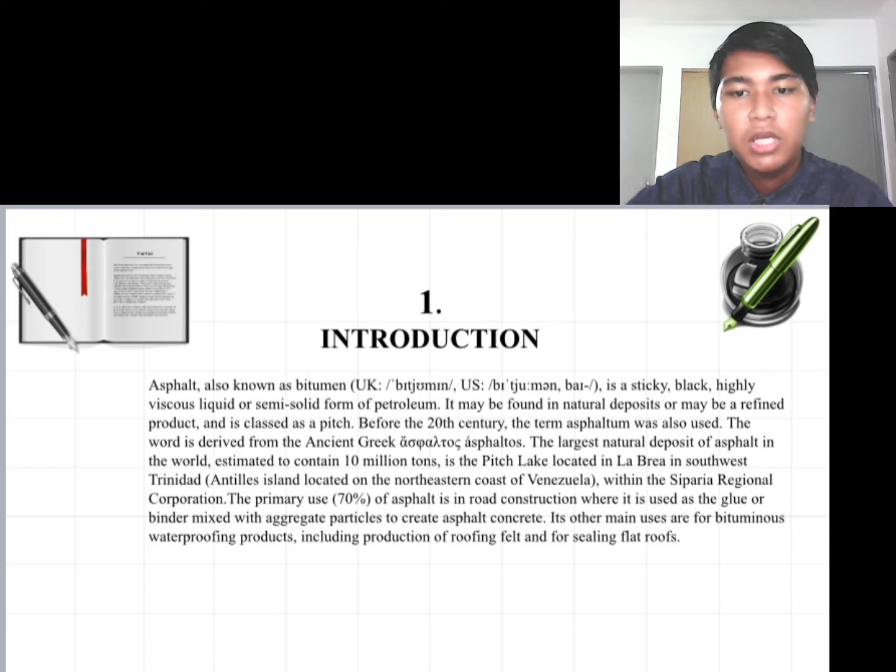Siparia Regional Corporation. The primary use, 70% of asphalt, is in road construction, where it is used as the glue or binder mixed with aggregate particles to create asphalt concrete. Its other main uses are for bituminous waterproofing products, including production of roofing felt and for sealing flat roofs.

In material sciences and engineering, the terms asphalt and bitumen are often used interchangeably to mean both natural and manufactured forms of the substance, although there are regional variations as to which term is most common. Worldwide, geologists tend to favor the term bitumen for the naturally occurring material.

For the manufactured material, which is a refined residue from the distillation process of selected crude oils, bitumen is the prevalent term in much of the world. However, in American English, asphalt is more commonly used. To help avoid confusion, the phrases liquid asphalt, asphalt binder, or asphalt cement are used in the US.

Colloquially, various forms of asphalt are sometimes referred to as tar, as in the name of La Brea Tar Pits. Although tar is a different material, naturally occurring asphalt is sometimes specified by the term crude bitumen.

Its viscosity is similar to that of cold molasses, while the material obtained from the fractional distillation of crude oil boiling at 525 degrees is sometimes referred to as refined bitumen.

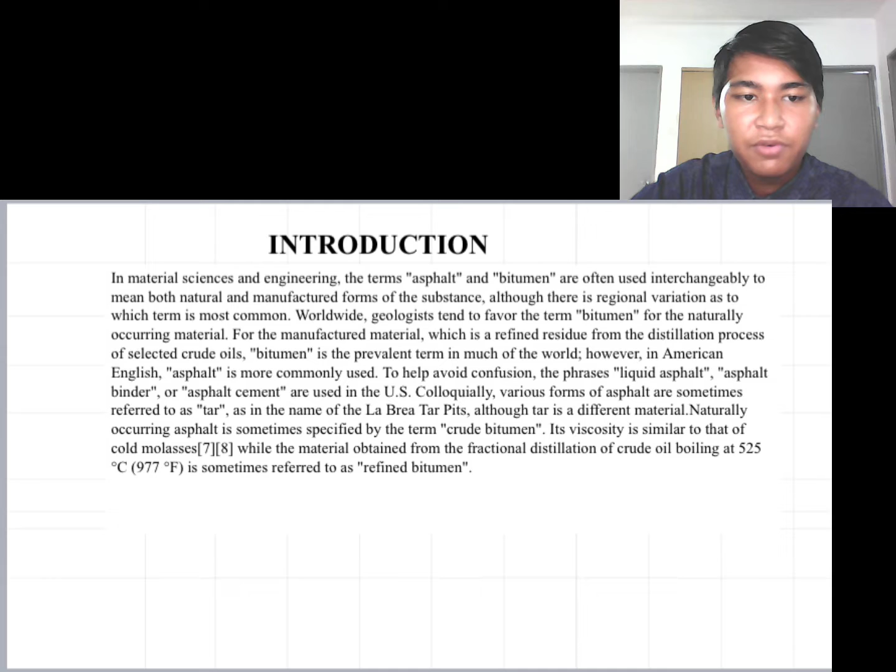Etymology. The word asphalt is derived from late Middle English, in turn from French asphalte, based on late Latin asphalton, asphaltum, which is the Latinization of the Greek asphaltos or asphalton, a word meaning asphalt, bitumen, pitch, which perhaps derives from alpha, not, without, the alpha privative, and sphallein, to cause to fall, baffle, in passive err,

be balked of. The first use of asphalt by the ancients was in the nature of cement, for securing or joining various objects, and it thus seems likely that the name itself was expressive of this application. Specifically, Herodotus mentioned that bitumen was brought to Babylon to build its gigantic fortification wall.

From the Greek, the word passed into late Latin and thence into French asphalte and English asphaltum and asphalt. In French, the term asphalte is used for naturally occurring asphalt-soaked limestone deposits, and for specialized manufactured products with fewer voids and greater bitumen content than the asphaltic concrete used to pave roads. The word bitumen is from Latin and passed via French into English.

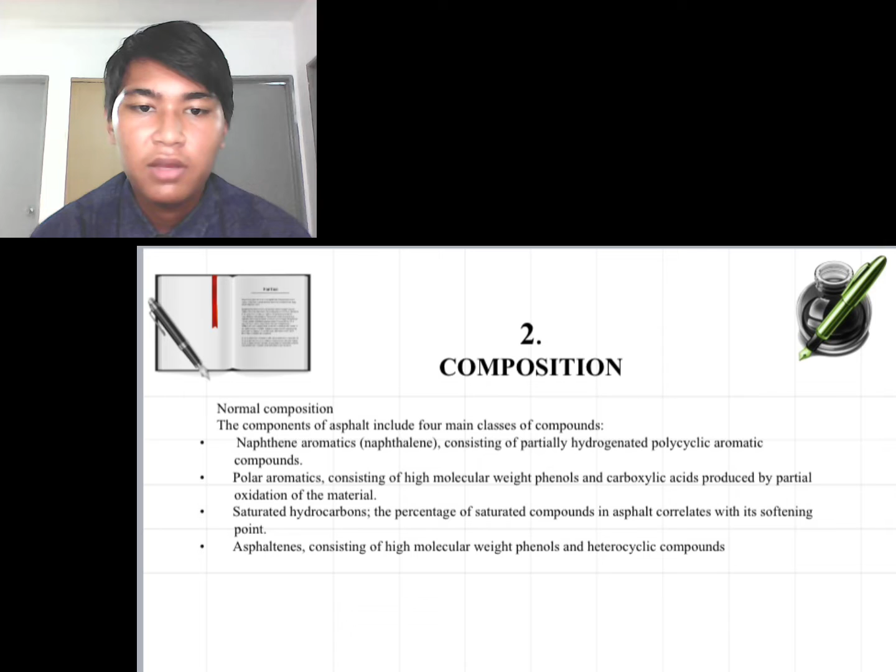The percentage of saturated compounds in asphalt correlates with its softening point. The fourth or last one is asphaltenes, consisting of high molecular weight phenols or heterocyclic compounds. The naphthene aromatics and polar aromatics are typically the majority components. Most natural bitumens also contain organosulfur compounds, resulting in an overall sulfur content of up to 4%. Nickel and vanadium are found at less than 10 parts per million.

As is typical of some petroleum, the substance is soluble in carbon disulfide. It is commonly modeled as a colloid with asphaltenes as the dispersed phase and maltenes as the continuous phase. It is almost impossible to separate and identify all the different molecules of asphalt because the number of molecules with different chemical structure is extremely large. Asphalt may be confused with coal tar, which is a visually similar black thermoplastic material produced by the destructive distillation of coal.

During the early and mid-20th century, when town gas was produced, coal tar was a readily available byproduct and extensively used as the binder for road aggregates. The addition of coal tar to macadam roads led to the word tarmac, which is now used in common parlance to refer to road-making materials. However, since the 1970s, when natural gas succeeded town gas, asphalt has completely overtaken the use of coal tar in this application.

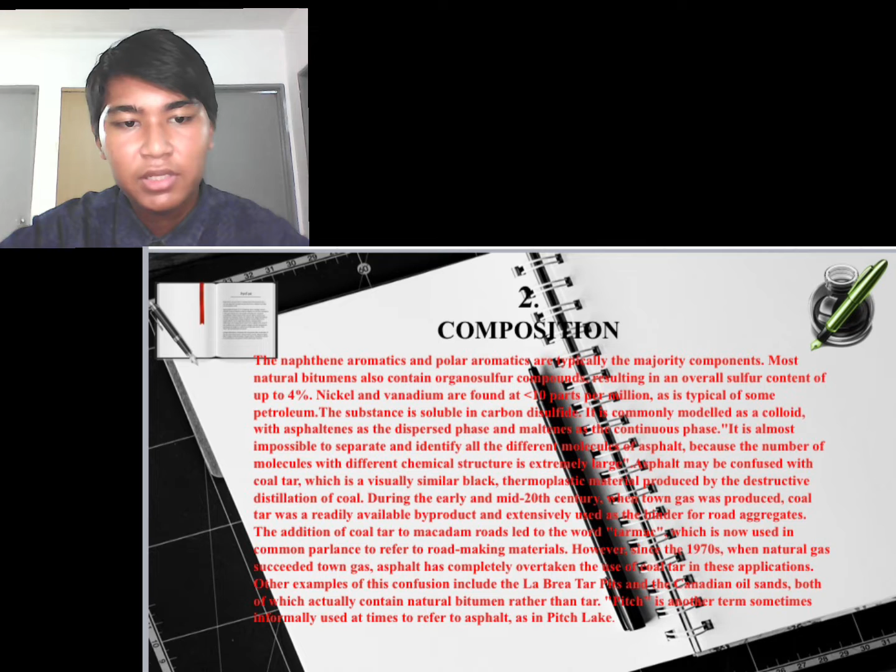Other examples of this confusion include the La Brea tar pits and the Canadian oil sands, both of which actually contain natural bitumen rather than tar. Pitch is another term sometimes informally used to refer to asphalt, as in Pitch Lake. Additives, mixtures, and contaminants. For economic and other reasons, asphalt is sometimes sold combined with other materials, often without being labeled as anything other than simply asphalt.

Of particular note is the use of re-refined engine oil bottoms, REOB or REOBs, the residue of recycled automotive engine oil collected from the bottoms of re-refining vacuum distillation towers, in the manufacture of asphalt. REOB contains various elements and compounds found in recycled engine oil, additives to the original oil, and material accumulating from its circulation in the engine, typically iron and copper. Some research has indicated a correlation between this adulteration of asphalt and poorer performing pavement.

The third one is occurrence. The majority of asphalt used commercially is obtained from petroleum. Nonetheless, large amounts of asphalt occur in concentrated form in nature. Naturally occurring deposits of bitumen are formed from the remains of ancient microscopic algae, diatoms, and other once living things. These natural deposits of bitumen have been formed during the Carboniferous period, when giant swamp forests dominated many parts of the earth. They were deposited in the mud on the bottom of the ocean or lake where the organisms lived. Under the heat above 50 degrees and pressure of burial deep in the earth, the remains were transformed into materials such as bitumen, kerogen, or petroleum.

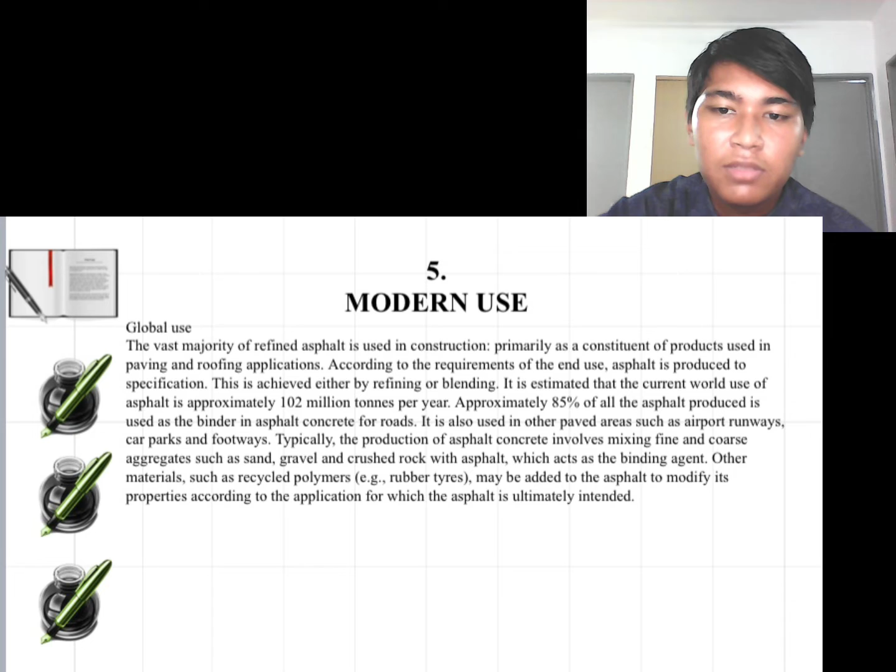Typically, the production of asphalt concrete involves mixing fine and coarse aggregates such as sand, gravel, and crushed rock with asphalt, which acts as the binding agent. Other materials such as recycled polymers, for example rubber tires, may be added to the asphalt to modify its properties according to the application for which the asphalt is ultimately intended. A further 10% of global asphalt production is used in roofing applications, where its waterproofing qualities are invaluable. The remaining 5% of asphalt is used mainly for sealing and insulation purposes in a variety of building materials such as pipe coatings, carpet tile backing, and paint.

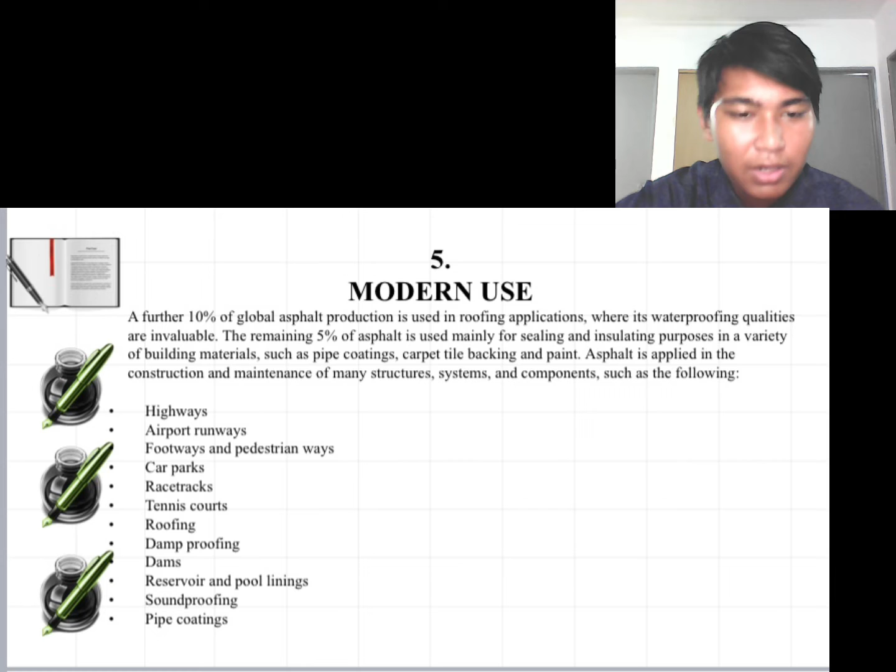Asphalt is applied in construction and maintenance of many structures, systems, and components such as the following: highways, airport runways, footways and pedestrian ways, car parks, racetracks, tennis courts, roofing, damp proofing, dams, reservoir and pool linings, soundproofing and pipe coatings. Rolled asphalt concrete.

The largest use of asphalt is for making asphalt concrete for road surfaces. This accounts for approximately 85% of the asphalt consumed in the United States. There are about 4,000 asphalt concrete mixing plants in the US and a similar number in Europe. Asphalt concrete pavement mixes are typically composed of 5% asphalt cement and 95% aggregates like stone, sand, and gravel.

Due to its highly viscous nature, asphalt cement must be heated so it can be mixed with the aggregates at the asphalt mixing facility. The temperature required varies depending upon the characteristics of the asphalt and the aggregates, but warm mix asphalt technologies allow producers to reduce the temperature required.

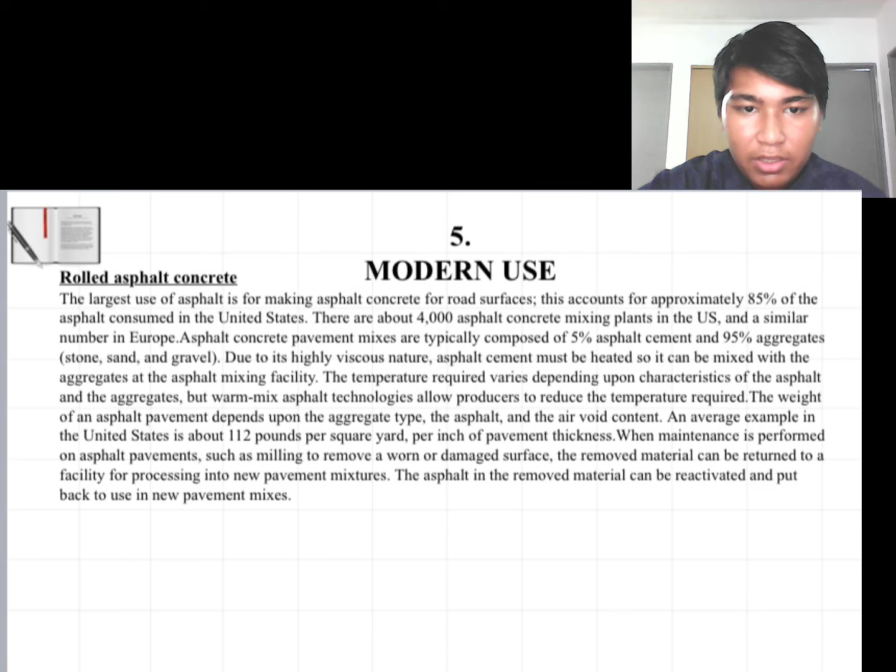The weight of an asphalt pavement depends upon the aggregate type, the asphalt, and the air void content. An average example in the United States is about 112 pounds per square yard per inch of pavement thickness. When maintenance is performed on asphalt pavements, such as milling to remove a worn or damaged surface, the removed material can be returned to a facility for processing into new pavement mixtures. The asphalt in the removed material can be reactivated and put back to use in new pavement mixes.

Mastic asphalt. Mastic asphalt is a type of asphalt that differs from dense graded asphalt concrete in that it has a high asphalt binder content, usually around 7 to 10% of the whole aggregate mix, as opposed to rolled asphalt concrete, which has only around 5% asphalt. This thermoplastic substance is widely used in the building industry for waterproofing flat roofs and tanking underground. Mastic asphalt is heated to a temperature of 210 degrees and is spread in layers to form an impervious barrier about 20 millimeters thick.

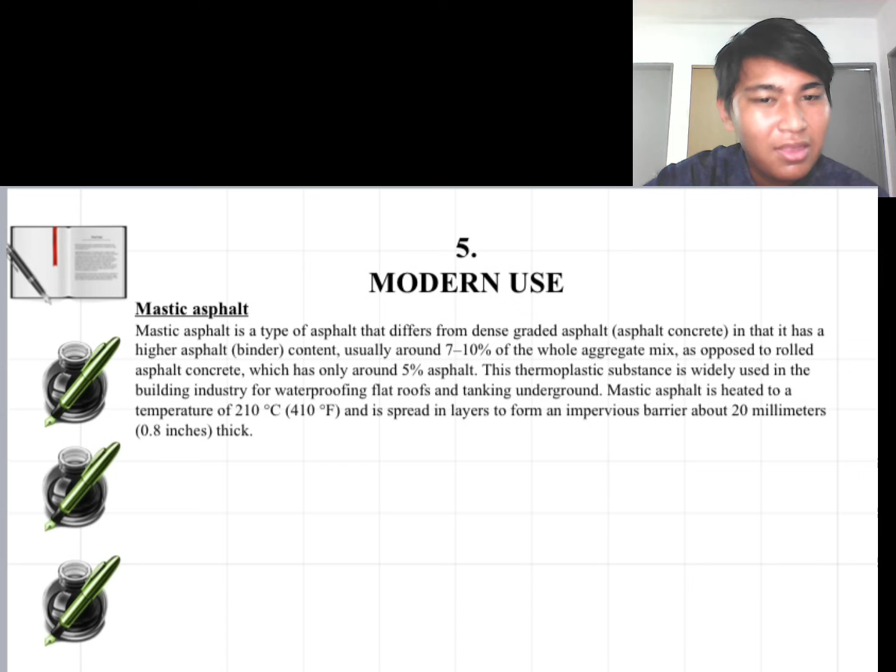Number 6 is production. About 40 million tons were produced in 1984. It is obtained as the heavy, difficult to distill fraction; material with a boiling point greater than around 500 degrees is considered asphalt. Vacuum distillation separates it from the other components in crude oil such as naphtha, gasoline, and diesel. The resulting material is typically further treated to extract small but valuable amounts of lubricant and to adjust the properties of the material to suit applications.

In a de-asphalting unit, the crude asphalt is treated with either propane or butane in a supercritical phase to extract the lighter molecules, which are then separated. Further processing is possible by blowing the product, namely reacting it with oxygen. This step makes the product harder and more viscous.

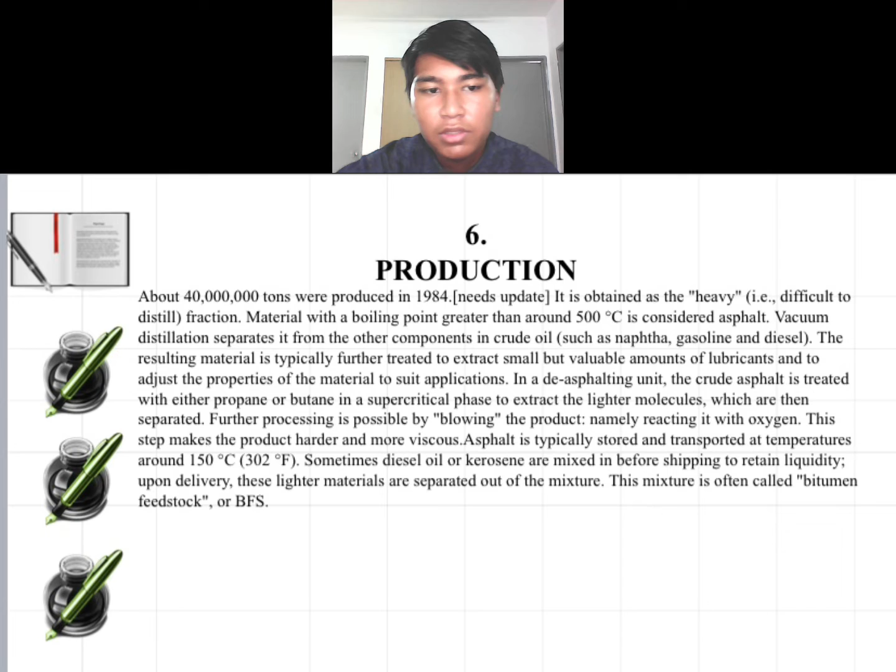Asphalt is typically stored and transported at temperatures around 150 degrees. Sometimes diesel oil or kerosene are mixed in before shipping to retain liquidity. Upon delivery, these lighter materials are separated out of the mixture. This mixture is often called bitumen feedstock or BFS.

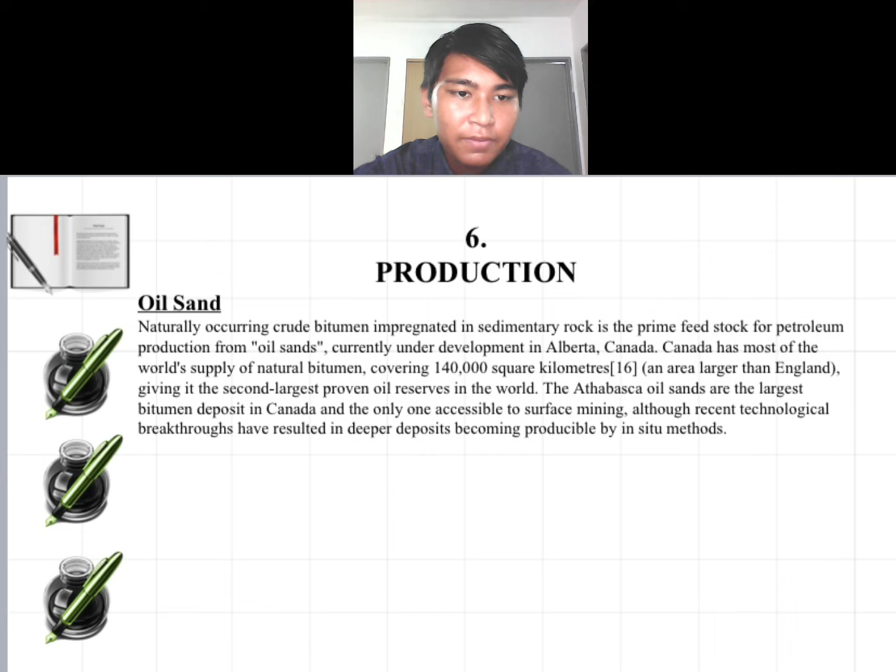Oil sand, naturally occurring crude bitumen impregnated in sedimentary rock, is the prime feedstock for petroleum production from oil sands, currently under development in Alberta, Canada. Canada has most of the world's supply of natural bitumen, covering 140,000 square kilometers, an area larger than England, giving it the second largest proven oil reserves in the world. The Athabasca oil sands are the largest bitumen deposits in Canada and the only one accessible to surface mining, although recent technological breakthroughs have resulted in deeper deposits becoming producible by in situ methods.

Alternatives and bioasphalts. Although uncompetitive economically, asphalt can be made from non-petroleum based renewable resources such as sugar, molasses and rice, corn, potato starches. Asphalt can also be made from waste material by fractional distillation of used motor oil, which is sometimes otherwise disposed of by burning or dumping into landfills.

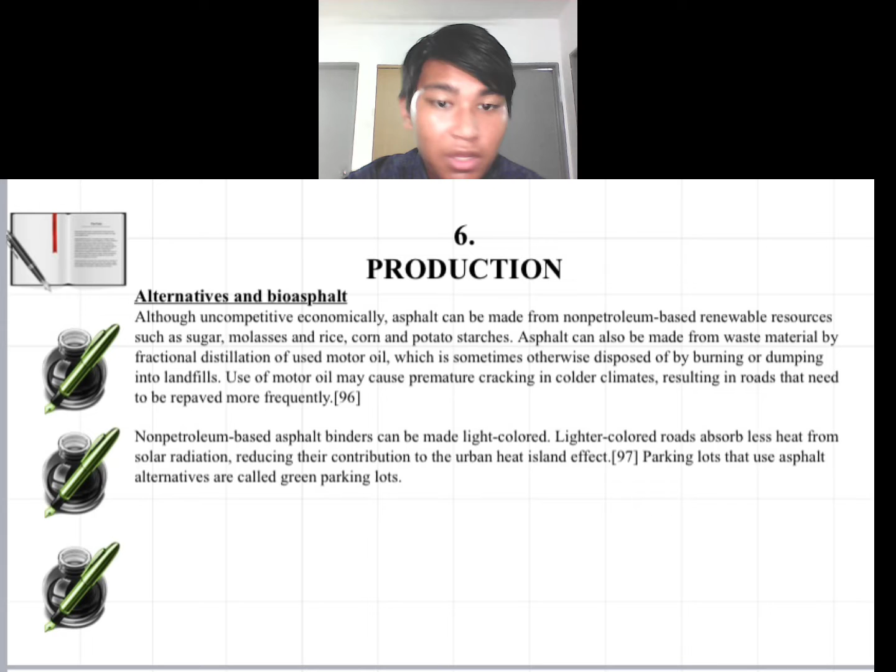Use of motor oils may be a cause of premature cracking in colder climates, resulting in roads that need to be repaved more frequently. Non-petroleum based asphalt binder can be made light-colored. Light-colored roads absorb less heat from solar radiation, reducing their contribution to the urban heat island effect. Parking lots that use asphalt alternatives are called green parking lots.

Albania deposits. Selenizza is a naturally occurring solid hydrocarbon bitumen found in native deposits in Selenica in Albania, the only European asphalt mine still in use. The bitumen is found in the form of veins, filling cracks in a more or less horizontal direction.

The bitumen content varies from 83% to 92% soluble in carbon disulfide, with a penetration value near to zero and a softening point, ring and ball, around 120 degrees. The insoluble matter, consisting mainly of silica ore, ranges from 8% to 17%. Albanian bitumen extraction has a long history and was practiced in an organized way by the Romans.

After centuries of silence, the first mentions of Albanian bitumen appeared only in 1868, when the Frenchman Coquand published the first geological description of the deposits of Albanian bitumen. In 1875, the exploitation rights were granted to the Ottoman government, and in 1912 they were transferred to the Italian company named Simsa. Since 1945, the mine was exploited by the Albanian government, and from 2001 to date, the management passed to a French company, which organized the mining process for the manufacture of natural bitumen on an industrial scale.

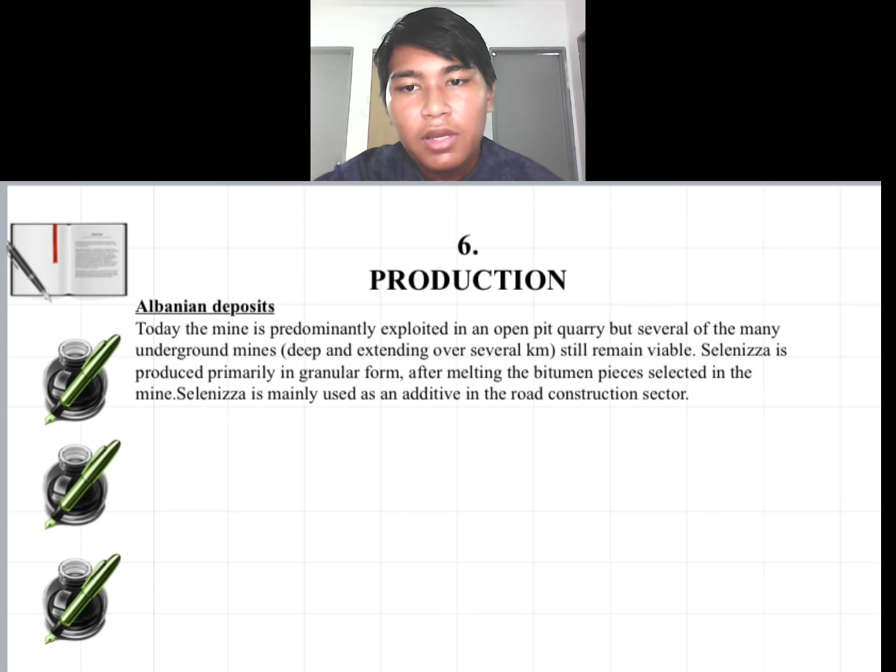Still an Albanian deposit today, the mine is predominantly exploited in an open pit quarry, but several of the many underground mines, deep and extending over several kilometers, still remain viable. Selenizza is produced primarily in granular form after melting the bitumen pieces selected in the mine. Selenizza is mainly used as an additive in the road construction sector.

Number 7 is recycling. Asphalt is a commonly recycled material in the construction industry. The two most common recycled materials that contain asphalt are reclaimed asphalt pavement, RAP, and reclaimed asphalt shingles, RAS. RAP is recycled at a greater rate than any other material in the United States and typically contains approximately 5 to 6% asphalt binder. Asphalt shingles typically contain 20 to 40% asphalt binder.

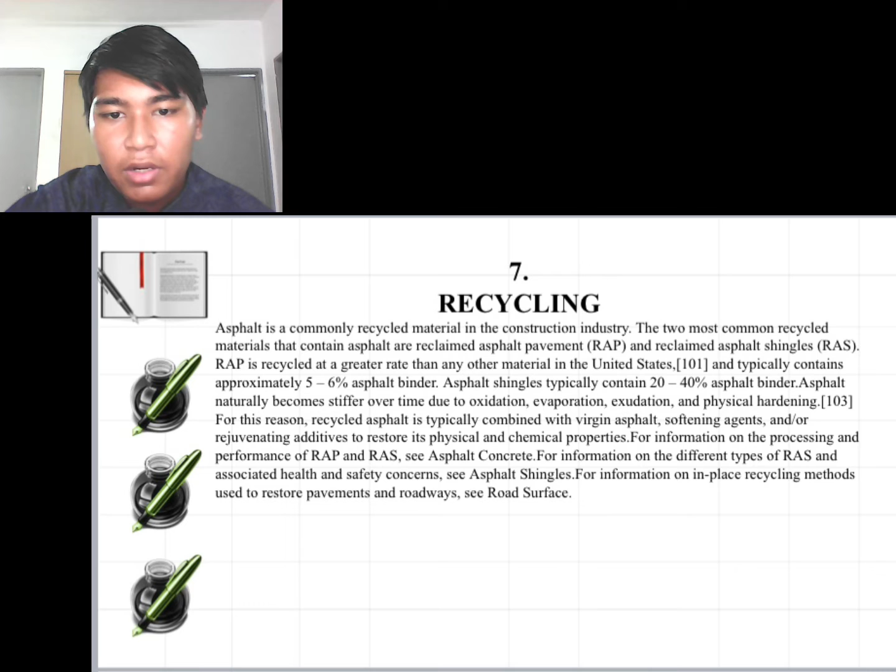Asphalt naturally becomes stiffer over time due to oxidation, evaporation, exudation, and physical hardening. For this reason, recycled asphalt is typically combined with virgin asphalt, softening agents, and/or rejuvenating additives to restore its physical and chemical properties. For information on the processing and performance of RAP and RAS, see asphalt concrete. For information on the different types of RAS and associated health and safety concerns, see asphalt shingles. And lastly, for information on in-place recycling methods used to restore pavement and roadways, see road surface.

Number 8 is economics. Although asphalt typically makes up only 4 to 5% by weight of the pavement mixture, as the pavement's binder, it is also the most expensive part of the cost of the road paving materials. During asphalt's early use in modern paving, oil refiners gave it away. However, asphalt is a highly traded commodity today. Its prices increased substantially in the early 21st century. An Australian government report states in 2002 asphalt sold for approximately $160 per ton. By the end of 2006, the cost had doubled to approximately $320 per ton, and then it almost doubled again in 2012 to approximately $610 per ton.

The report indicates that an average 1 mile long 4-lane highway would include 300 tons of asphalt, which in 2002 would have cost around $48,000. By 2006, this would have increased to $96,000 and by 2012 to $183,000, an increase of about $135,000 for every mile of highway in just 10 years.

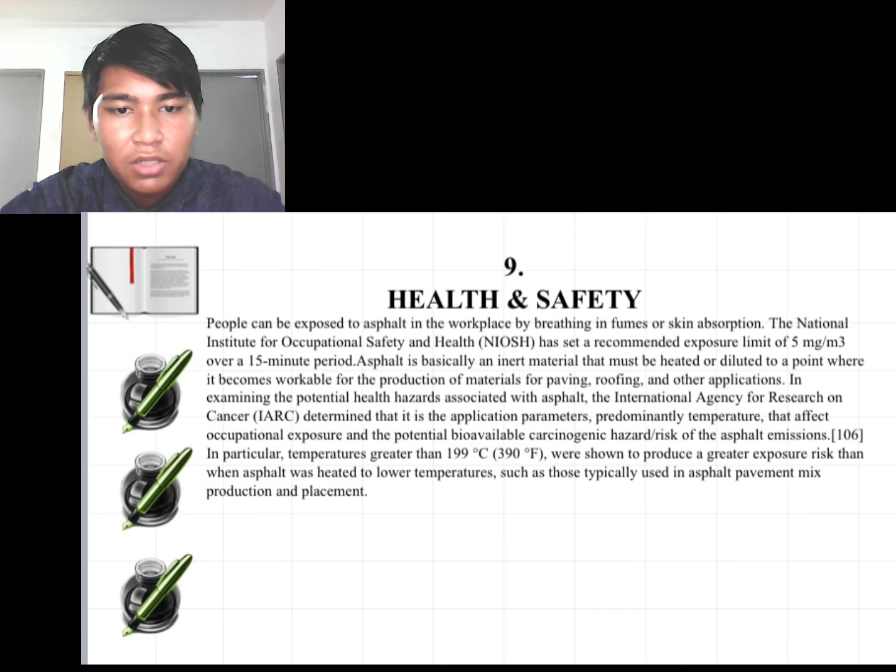Hi again, my name is Manazi. Now I'm going to present my journal that studies bitumen characteristics with the use of waste plastic.

So the abstract: in our country, plenty of industrial surplus is produced by industrial activities due to industries, refineries, and coal fields. Further, in addition to industrial waste products, municipal solid waste comprising non-biodegradable ingredients is created inside the municipal limits. This is a main basis of ecological pollution, and suitable disposal is a major difficulty in order to save the environment. The usage of surplus plastic in the formation of roads was the main concern taken in this route. Usage of appropriate solid waste in the building of roads not only makes available substantial savings on road material cost, but it also helps to solve the situation of this kind of waste material in India, much like in road construction of national highways, state highways and village roads.

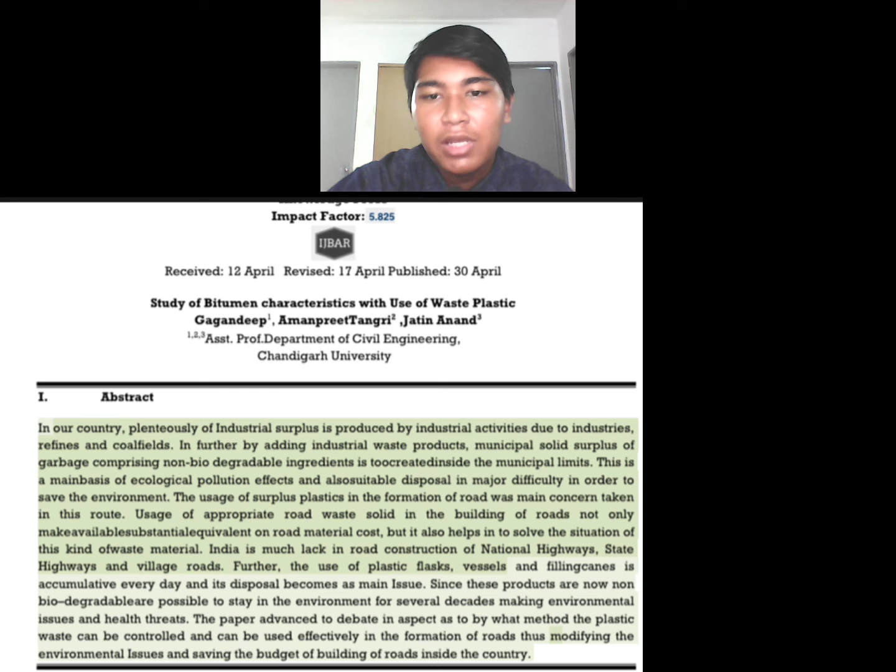So, for introduction, plastics are non-biodegradable synthetic polymers formed by a hydrocarbon chain with the addition of additives, shaped into finished products. These plastic polymers are broken down in the presence of a proper catalyst into monomers such as ethylene, propylene, vinyl, styrene, and benzene. These monomers are further chemically polymerized into various groups of plastic.

Removal of plastic surplus is a major concern in India. New methods have been advanced to decrease these adverse effects on the environment. The recently worldwide accepted methodology which can be effectively used for plastic dumping is incineration. However, incinerators discharge particularly toxic compounds, such as chlorinated dioxins and furans, consequently raising many environmental concerns. Nowadays, various safe disposal technologies of plastic waste have been investigated.

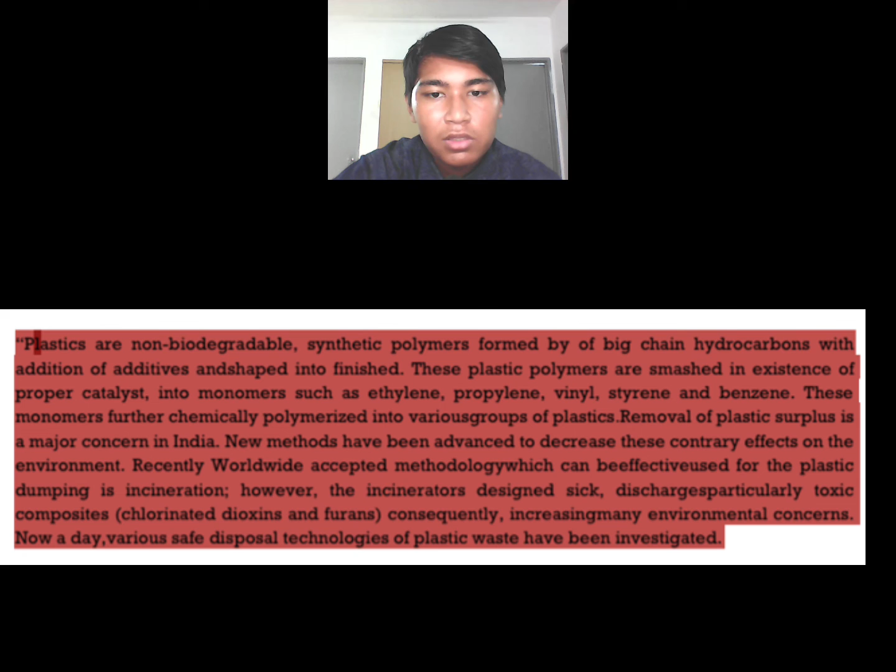So the aim and objective: the paper titled Use of Plastic Waste in Bitumen and Aggregate of Road aims at analyzing effects of utilization of plastic waste in aggregates and bitumen of road. The present study was initiated to study properties of normal and modified aggregates and bitumen. The major objectives of current work are: number one is to perform various tests on aggregate and bitumen. Number two is to analyze and discuss results obtained from tests. Number three is to find suitability for using plastic modified aggregate and bitumen.

Number four is variation of results of aggregate impact test by using different percentages of plastic. Number five is variation of results of Los Angeles abrasion test by using different percentages. Number six is variation of results of ductility test with respect to 0% plastic. And the last one is variation of results of penetration test with respect to 0% plastic.